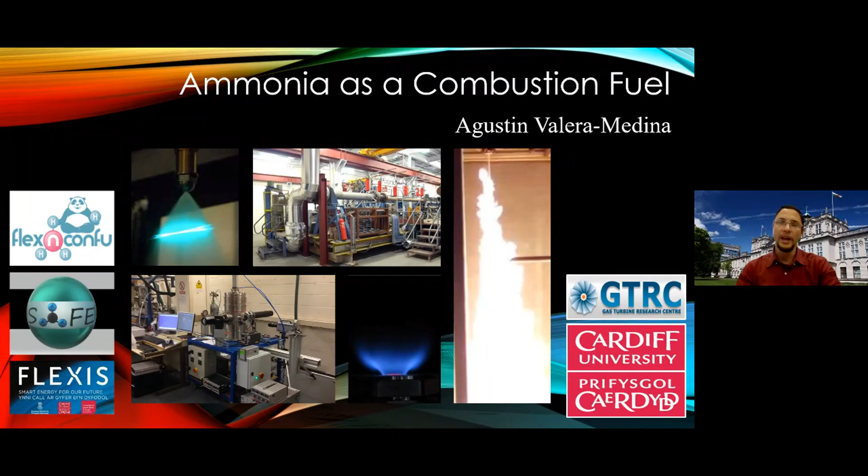Just as mentioned by Jaco, one of the things is that we're approaching the subject of ammonia as a combustion fuel, and in that sense, how it can be used to combust systems in internal combustion engines, furnaces, gas turbines, and propulsion systems. Some of the work that we've been doing relates to all these components, but also we are looking into public perception, and I will mention about it a little bit.

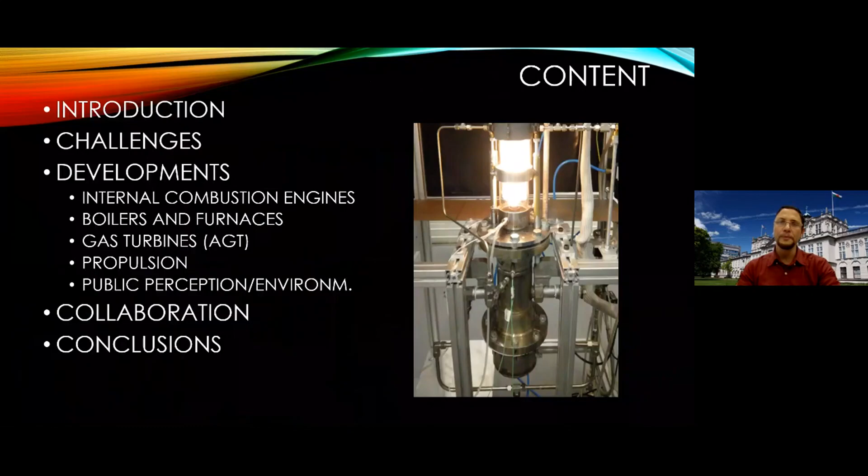Just as raised by Hans, and this is where I'll start my discussion, we're talking about renewables and then bringing all that energy to reduce greenhouse gases. Now we know already that these systems are very intermittent, and this is something that is obvious not only because we know that the sun goes and disappears, especially here in Northern Europe, but also in places like, for example, Australia.

So what happened a few years ago was Australia lost power for almost 2 weeks. They had blackouts, and this was because they were relying on alternative energies at the moment and batteries that were not coping with the demand that they had at the moment.

Just a year and a half ago, 2 years ago, here in the UK, we suffered something similar. All the region of the Midlands suffered a blackout of almost 1 million people losing power, and that was because on the day we were running at almost 50% wind power, which takes us back to thinking we need to store some of that energy if we want to have a reliable, independent power grid.

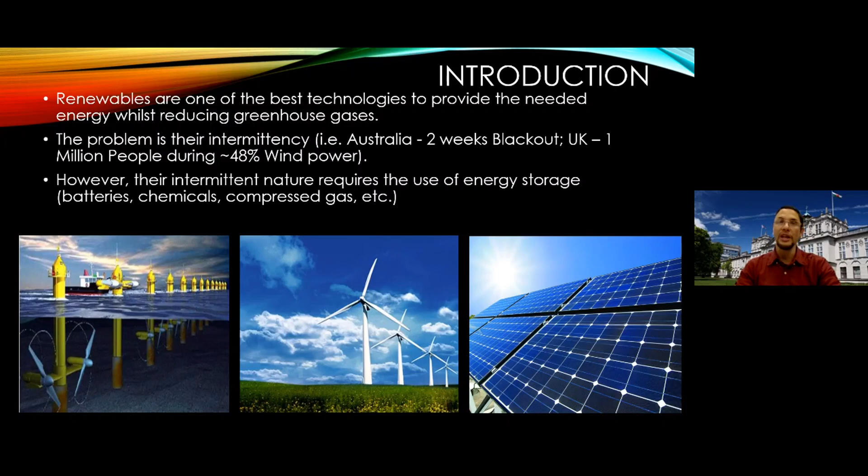And obviously, many things come to mind, and on the basis of what Hans mentioned, we've got all these different ways of storing energy, from batteries, chemicals, and compressed gas. But for our purpose, thinking about chemicals, ammonia is one of the ways forward. It's because we can capture not only these renewables, but also stranded resources, for example in the desert, offshore wind facilities far away from land, and marine energy. We can also recover some waste streams.

We can then have this energy stored for a long period of time at very cheap prices compared to hydrogen, because we don't need to compress it or liquefy it, we just need to have it slightly refrigerated or slightly pressurized. So in terms of long-term, 180 days, we're talking about differences of almost 30 times the cost between one and the other. We can also use it for islands and isolated regions.

We can employ it as a fertilizer, as it's been used for over 150 years, but also now as a fuel. It contains, really interestingly, going back to Hans' graphs, more hydrogen than hydrogen itself, because we've got another atom of hydrogen that now plays in this complexity. So we've got more hydrogen that we can transport in this way, and a very well-developed infrastructure worldwide that accounts for almost 200 billion euros per year.

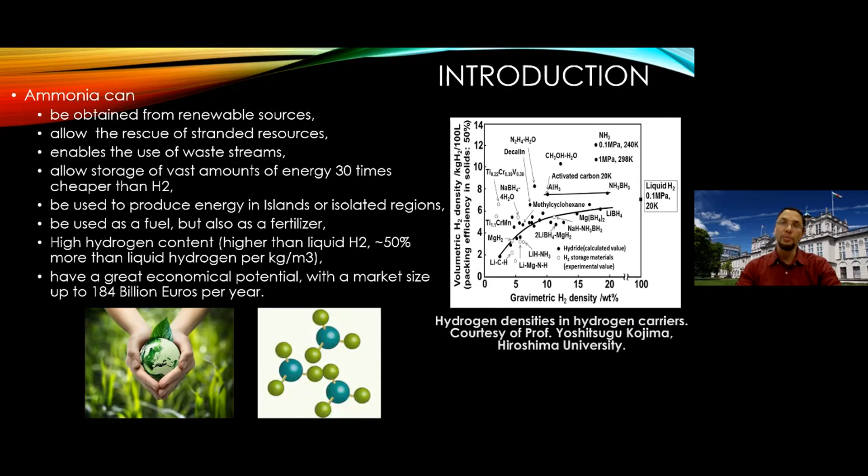You can see on the right-hand side of my screen that there are so many different ways and methods to transport hydrogen, from very complex materials to ammonia. And ammonia is the one that shows one of the best properties to do so. So again, why not use it? There are many ways forward to employ it, and as mentioned before, we've got different methods to produce it.

If we're thinking about using it as a fuel, then we can employ it in fuel cells. We can use it for transport, internal combustion engines, for heating and cooling, because it's got fantastic cooling properties. It can be burned. We can use it for process industries, propulsion, stationary power, and many other applications. One of the things that always comes to mind is, well, how are we going to do that? How is the public going to react?

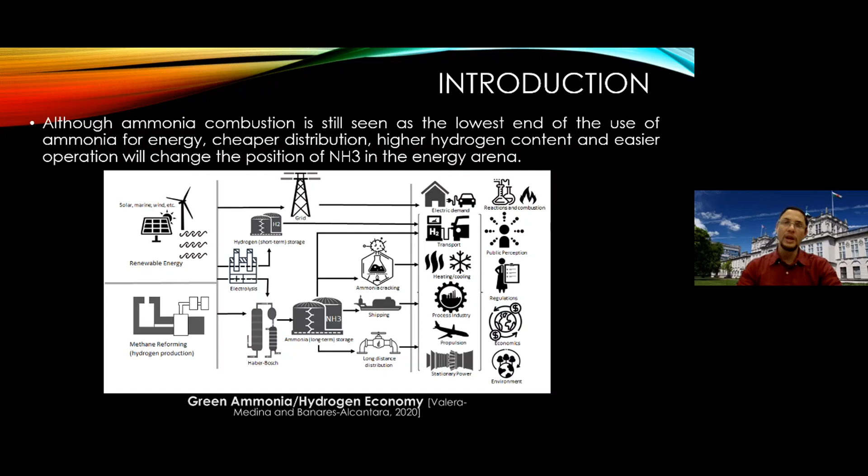Do we need the regulations to do so? What are the economics around this? Is the environment going to be better or worse? And then finally, those fundamental things about the combustion of doing so, because it's not that straightforward. So that's the reason we have engaged on this subject, in collaboration with so many other partners, that we're trying to solve.

And to the question that was just recently asked, and again, just backing up Hans' argument, in terms of zero carbon fuels, the one that shows the greatest energy density is ammonia. When compared to fossil fuels, yes, we do have diesel, petrol, ethanol, etc., that have higher energy densities. But when it comes to having zero carbon, ammonia compared to hydrogen, even liquid lithium batteries, is much better.

Something that is really interesting as well is that when we think about the cost, as I mentioned, moving liquefied or pressurized hydrogen compared to ammonia, ammonia is much cheaper than the other two. And thinking about long distances, either by ship, by rail, or by lorry, that is one of the potential applications that we can use ammonia for.

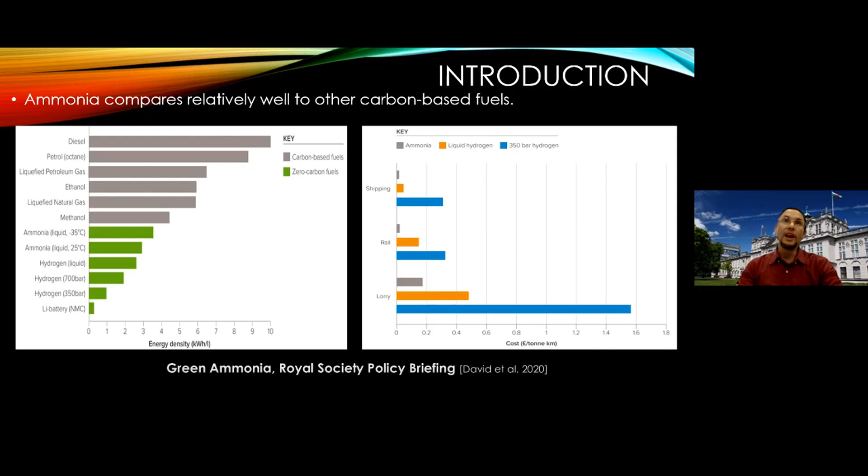One of the things that is obvious, and again, I would like to raise, is that ammonia and hydrogen in terms of power applications and combustion systems are going to be playing together. It's not that we're going to discard hydrogen completely or we're going to go for ammonia, but they're going to be complementary to each other.

One other thing that I want to mention as well is that when we compare these systems and the renewable energy and how we can use the final energy to produce power, in comparison with all these different chemicals that we have at hand, that is methane, methanol, ammonia, and also hydrogen, when we take the whole chain, the final efficiency that we can get out of these chemicals is similar in terms of ammonia compared to methane and methanol.

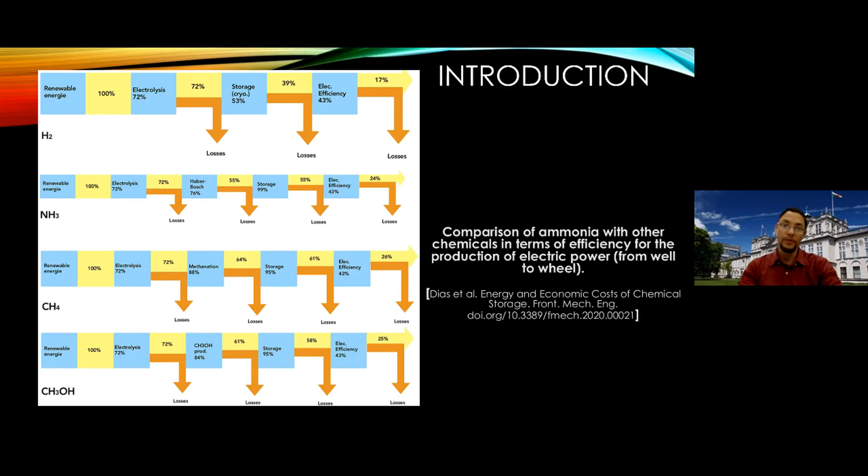But when it comes to hydrogen, because of the high amount of energy and low efficiency that we require for its storage, if we're thinking about cryogenic storage, it brings down the final efficiency that we can get to produce electric power by almost 10%. So that's, again, taking us into another argument of why not ammonia.

As I mentioned before, ammonia is going to be one of the chemicals that is going to play an important role, and this is now being said by the International Energy Agency, and we need to think about a combination of these two chemicals. It goes with so many studies that the US has been conducting over the years, and this is just one of the latest, released around 6 months ago, analyzing different cities, different situations, where they were assessing hydrogen or ammonia or a combination of both in these locations.

But if you need to store it or transport it, then you need to have the ammonia, in which case you will have seasonal stranded energy stored for a longer period and at lower costs. So therefore, a combination of both is what the future might be looking like in terms of combustion and power applications. As I mentioned, ammonia by itself might not solve all the problems, but it is definitely going to be part of the mix of fuels we'll have in the near future.

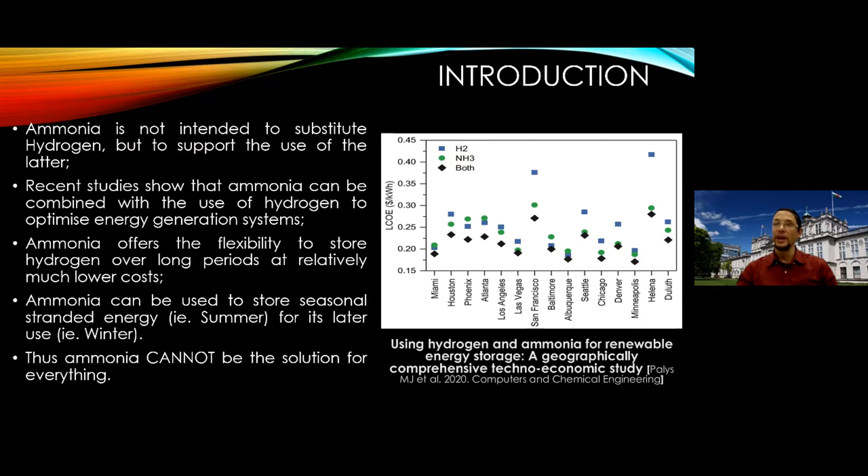And this has been recognized by many organizations. Again, the International Energy Agency in 2018 decided to include ammonia among their carriers of energy. And that was also followed by the European Union, by the UK government, by the Japanese government that has been leading all this agenda around the use of hydrogen and ammonia, Australia and many others.

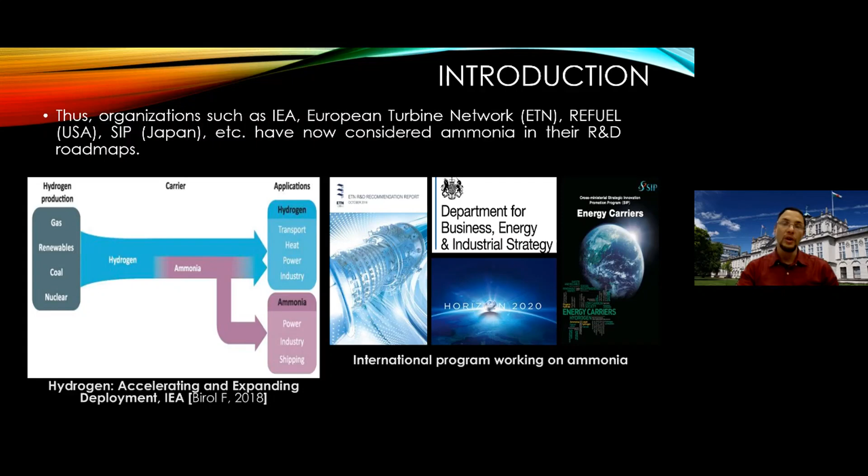The US, for example, has just released a new program where they are looking into the production of gas turbines and furnaces running on ammonia, and we're talking about $10 million that they just put into research and development. And again, many other economies are looking into how we can make this happen.

Just here's some briefing, and probably all of you know, as knowledge that you might have around ammonia, all these big programs that are now going ahead in Australia, where we're talking about all the diversification and delivery of energy from the north to the Southeast Asian region. The CF Plan agreement that was just signed a few months ago to then develop all these green technologies for the production of green ammonia.

And then finally, Neom City that is now announcing Air Products collaboration, a 5 billion renewable hydrogen to ammonia project in Saudi Arabia. And that adds to, for example, what the Japanese have been doing in furnaces, systems, and gas turbines. And recently, just 2 weeks ago, Mitsubishi releasing a communication saying that they're going to run by 2023, 2024, a 40 megawatt power unit running purely on ammonia. And this is the unit that they will be using.

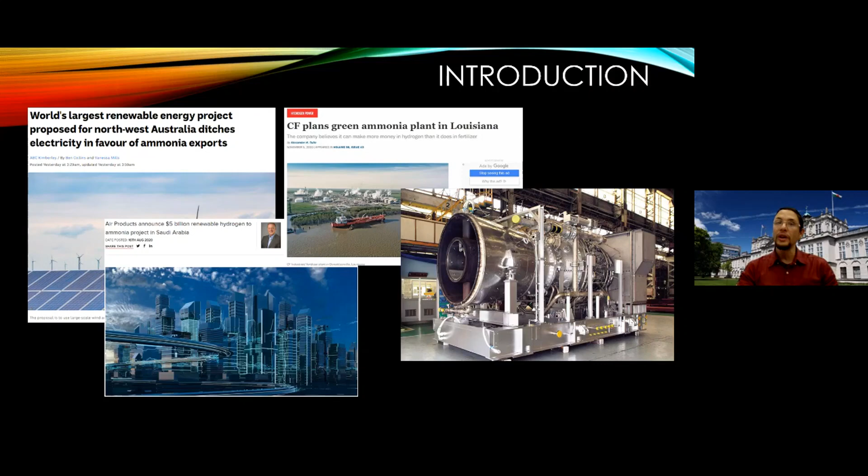So things are happening, things are going ahead, and it's not only in the fertilizing world, it's going to take over as well as part of the energy mix for power production, in synthesis and devices for industrial purposes. In our case, what I'm going to approach is, out of the 4 different challenges that we got to address when we're talking about ammonia, just the 2 in the middle. So ammonia needs to be carbon free, and we need to then reduce the cost and improve efficiency, as has been raised by Hans.

We need as well to then make it a fuel that allows for power generation at utility scale. We need to then as well acknowledge the public acceptance and the regulations that are required to do so, because otherwise we might have the best technology, but if people don't want to use it, there's no way forward for us. And then finally, the economics that need to be profitable for whoever wants to take over this subject.

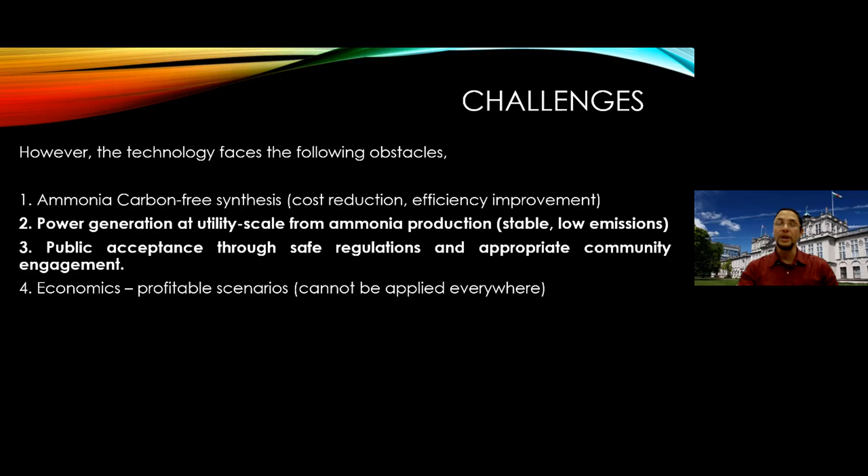So for that reason, we have engaged with lots of different partners, and I'll show you now a little bit of what we have been doing, and different subjects that go from chemistry, physics, engineering, biology, social sciences, etc., to develop the technologies that will allow us to do so, and then always think about how we can improve the environment, reduce climate change, avoid emissions, and obviously get profitable, high-efficient systems to do so.

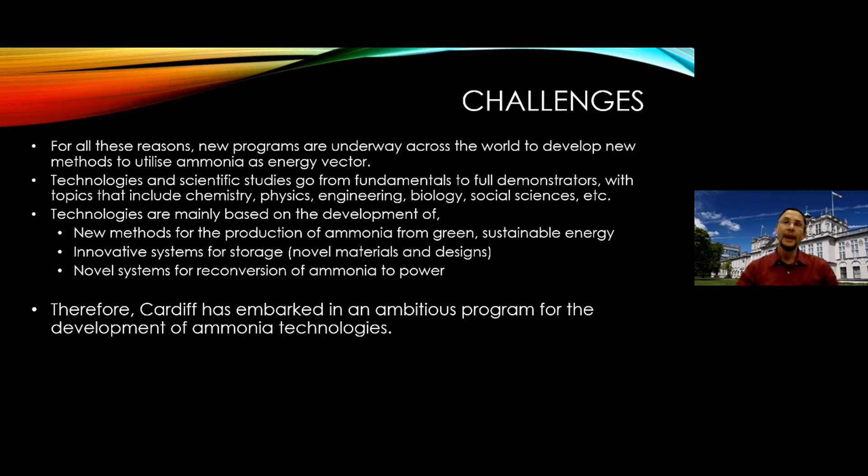So yes, just to give you a hint of what we have been doing over the past few years, we were part of the Rutherford Appleton Laboratory demonstrator at Oxford. This was one of the first, if not the first demonstrator worldwide to show the whole chain of production, storage, and consumption of ammonia, and then back to the grid energy. And we got it at Oxford, Siemens and STFC that is now holding the whole facility. They're always open to receive people interested in knowing a little bit more about the concept.

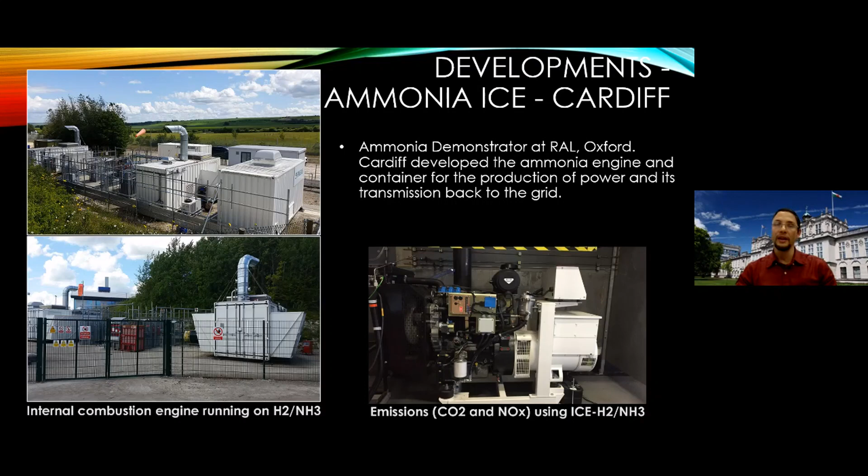In our case, what we did was develop the container that hosts the internal combustion engine that is running the ammonia to power part of the system. And this is the engine that we've been using. We converted it, and then instead of just running it on natural gas that it was designed for, what we had to do was redesign it and then allow for blends of ammonia hydrogen to run it properly.

So you can see here on the left side that we started running on some methane, and then eventually we just brought it down. So once we got it hot enough, we could then just put in all the hydrogen and ammonia to start producing energy at the same values that we had previously using just pure methane. And as you can see on the other side, we got all these emissions that are going down. Obviously CO2, as we increase the methane fraction, is going up. But when we were running on ammonia hydrogen, obviously zero CO2, CO.

Another interesting thing is that NOx was reduced under those fractions. And this comes as a surprise, and it's got to do with the unburned ammonia that we had in the internal combustion engine, another subject that I'll mention later down the line.

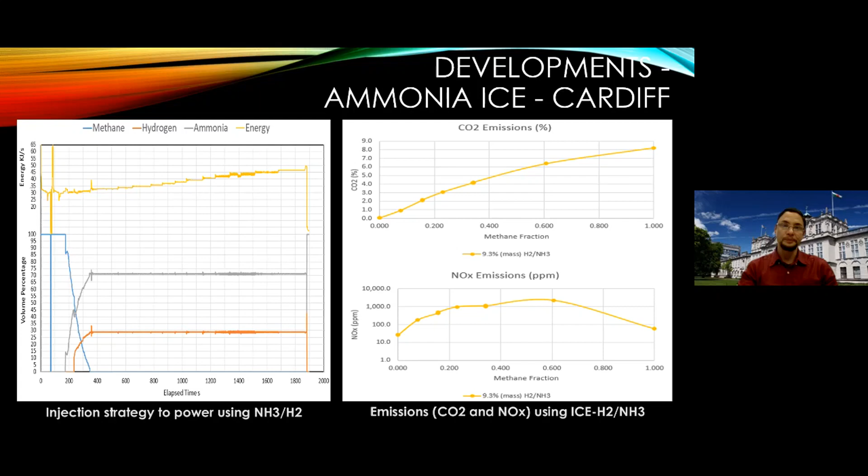Another thing that is interesting, thinking about the techno-economics of all these units, we've heard a lot about the marine industry now going ahead into development of internal combustion engines that will be run probably in the next couple of years, MAN leading some of these works, and how ammonia is going to play an important role in the following years. But something that again comes back as the techno-economic challenges that we got to surpass before we can do that is that we do have an understanding, as I showed before, of internal combustion engines.

In the case of ammonia, we don't have anything yet. And that's, again, something that needs to take us a little bit further, and we need to put some time to work on it, and effort worldwide to make this happen.

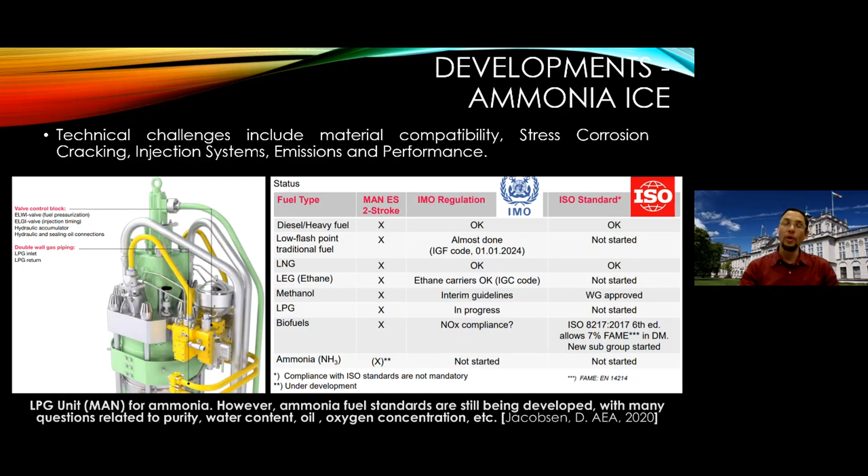For boilers and furnaces, ammonia can also be used. In the steel industry, we have the production of loads of this ammonia. For example, in the Arab world, you do have lots of this waste ammonia coming from oil and refineries that has most of the time been flared. And one of the things that can be done is actually recover some of this ammonia, and because it's got enough energy density, produce power, excess power for your units.

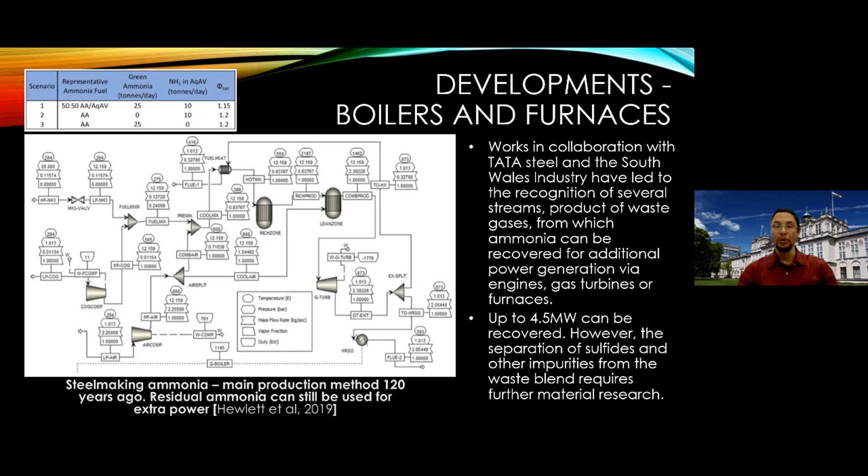And some of the works that we have been doing recently for Tata Steel show that the amount of ammonia that they got and the system that they employ for coke production can actually produce up to 4.5 megawatts of extra power if we were tapping into that ammonia. Now, one of the things is always the impurities that come with those gases, how to clean them up, things that, again, we are evaluating with Tata Steel and also with some other partners here in the region that produce cement.

In terms of gas turbines, which is the topic that we have been covering for a few years now, let me just start with this really nice assessment that was done recently by Oxford University, and they presented it in a UK-India ammonia meeting that we had just a few months ago. You can see here we have two engines, one running at 80 megawatts power on the left side. On the right side, we got one that is almost at 870, 90 megawatts.

And the interesting thing is that they were evaluating how much hydrogen would be needed if we wanted to run these units. So if we wanted to run, for example, for 1 hour, we would need tube trailers of almost half a ton of hydrogen, and 8 of those. Now, if you wanted to run it for 1 day, you would need a pipeline of 8 kilometers long to provide for that energy.

If we wanted to run the small engine of 80 megawatts power for 1 week, we would need 3 of these NASA super tanks that they use for the shuttle. And if we were thinking about running for just 1 month, that same unit on pure hydrogen, we would need 4 of these salt caverns, each of them containing around 810 tons of hydrogen.

So obviously, when we go an order of magnitude higher, that goes just berserk, completely out of hand. And just thinking about the case of 1 week of running that 870 megawatt power unit, we would need 9 salt caverns just to do so, which is, again, impossible, not feasible, and just not real.

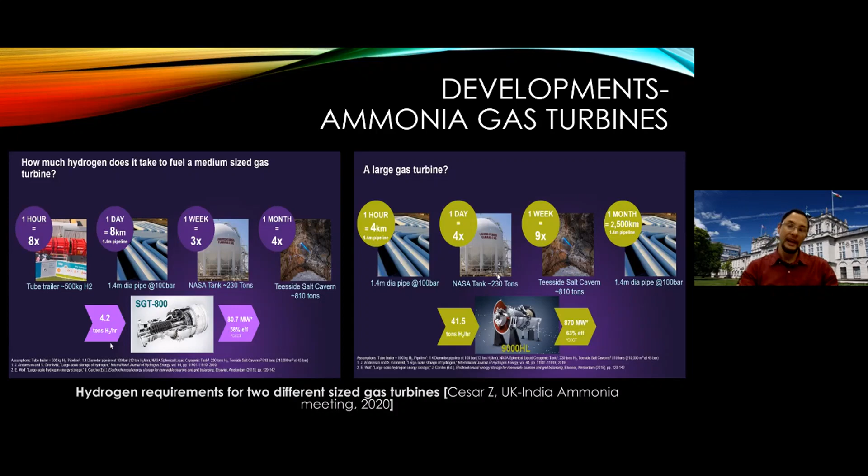But when we compare it with ammonia, something that is interesting is, because of that energy density and the amount of hydrogen that we got at hand, we would need the same amount of capacity if we compare it to hydrogen. One of these tanks that we use for ammonia that are common practice in the ammonia world, and again, you might have better details about this, can store almost the same amount of power that we would get from 11 salt caverns of hydrogen.

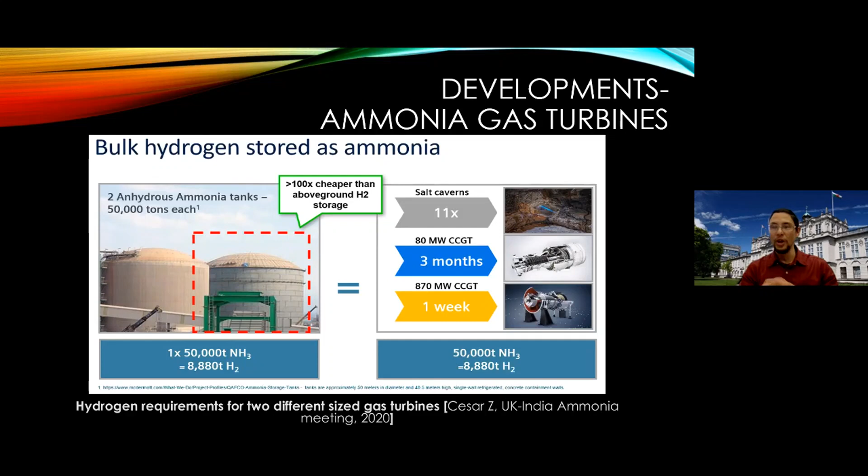So that means that if we wanted to run the 80 megawatt power unit, that single container of ammonia can run it up to 3 months. And if we want to run the 870 megawatts unit, it can go for up to 1 week. Just that single anhydrous ammonia tank, which is, again, fascinating if you compare it with the techno-economics that we got for hydrogen.

They did some other extra work on the gas turbine units, and they compared different cases: one splitting the ammonia entirely into hydrogen, another one having a combination of ammonia-hydrogen at 70-30%, and then finally using entirely ammonia.

So one of the things that they found was the efficiency, because again, as mentioned by Hans, all that energy that we put into cracking is going to be a toll that we need to take into account in the final production of energy. Comparing numbers and using different mechanisms, what they found out was that there was almost an 8% difference between the system efficiency of phase 1 to phase 3.

Now, this comes back to having phase 2. And phase 2 is because we also need to have combustion stability. Phase 3 might be feasible, but it's very difficult to stabilize an ammonia engine. This has to do with the flammability of ammonia, which is very dull compared to hydrogen, something that I'll mention right now.

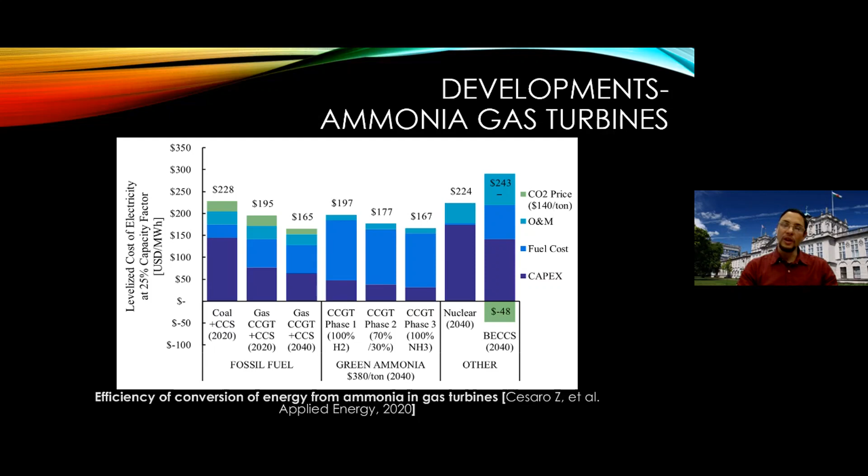They did some analysis on the levelized cost of electricity using the different platforms and the different phases, and you can see how, compared to fossil fuels, using green ammonia, as long as it stays at 380 dollars per ton, they have the same kind of cost as you would expect from fossil fuels with some CO2 pricing that might come at some point in the near future. So therefore, ammonia plays a really nice scenario for the near future, and allows us to think about how we can do so.

Going back to combustion and that blend that we had in phase 2, why do we want to think about 70-30? Well, the main reason is that the molecule of ammonia, when it burns, is very dull. We also have another thing to consider, and that is the NOx that we are going to produce. So for that, we have engaged in a lot of combustion programs and a lot of combustion research.

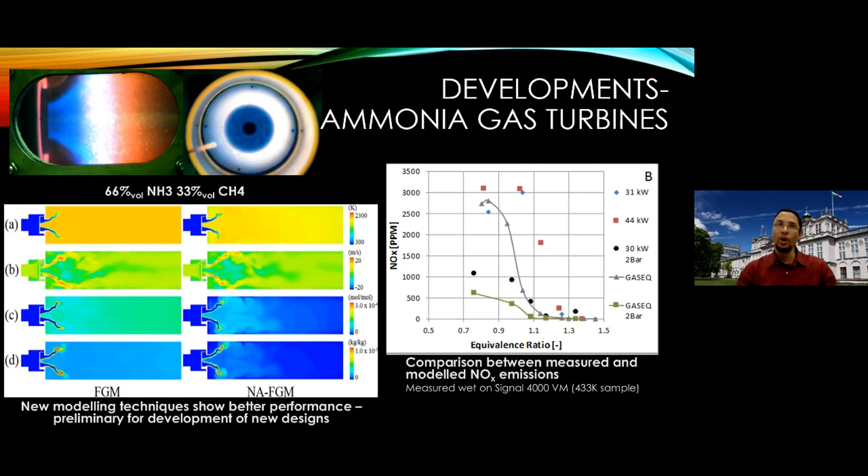Something that is always interesting is that when you run on enriched fuel conditions, an excess of fuel in your combustor, you get almost 0 or 10 parts per million NOx at those conditions. And we saw that happening when we were running with hydrogen-ammonia blends; it is always a trend. The reason is that ammonia is also a fantastic deNOxing chemical.

Ammonia has been used for a long time in diesel engines, in diesel catalytic systems, and for power applications in gas turbines and power plants, for decarbonization and deNOxing concepts. The same thing happens inside a combustor. If you have some excess of ammonia inside those combustors, you get some onboard ammonia that is going to burn and recombine with the NOx you're producing, and bring them down to levels of 10, 20 ppm in units with powers of a few megawatts.

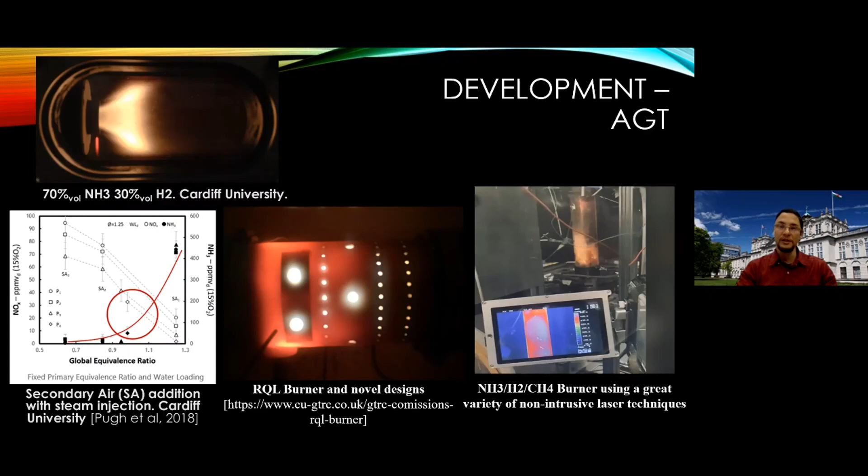And this is just talking about concepts that are still not well developed. We haven't talked about any stratification, any increase in temperature, pressurized conditions, anything like that. These are just preliminary analyses that have been done across the world, in Japan, at KAUST, in different organizations across Europe and in the US. So for that reason, what we have been developing over these years is this concept of new combustors that allow us to have high stability whilst having very low NOx emissions.

We have been going through a very long path. We are now at the stage where we're setting up and putting everything together in an auxiliary power unit to demonstrate the concept and have everything integrated into a cycle. So in a couple of years from now, we'll be able to demonstrate it for combinations of hydrogen and ammonia, with stable, high power production, very low NOx and reliable energy.

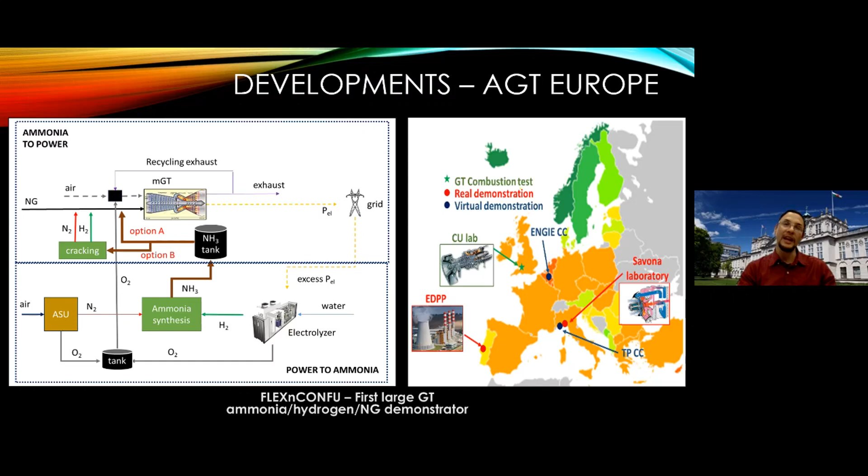We have also been working with our European partners in developing these ideas. We have a collaboration going on now with the University of Genoa, where they plan to assess a purely ammonia gas turbine of 300 kilowatts. Similarly, we're doing research with EDP, where the idea is to assess blends using ammonia, cracking some of it to produce ammonia-hydrogen blends, and finally putting it into a large power unit they have in Portugal. This goes into how we can use off-peak power to produce all this ammonia energy, and then, when we require it for peak hours, put it back into the engine to produce the excess energy we need at that time.

We got assessments showing that if we use ammonia's cooling, heating, and power applications—since ammonia has the incredible property of being a great coolant chemical—we can improve the efficiency of our Brayton cycles or combined cycles, reaching efficiencies almost at 60%. That compares to combined cycle efficiencies of current or newly developed fossil fuel based systems around 80%, but without any CO2 being involved in the process. It's very reasonable, extremely interesting, and this is without even having the stratified or more clever smart conditions we're now evaluating.

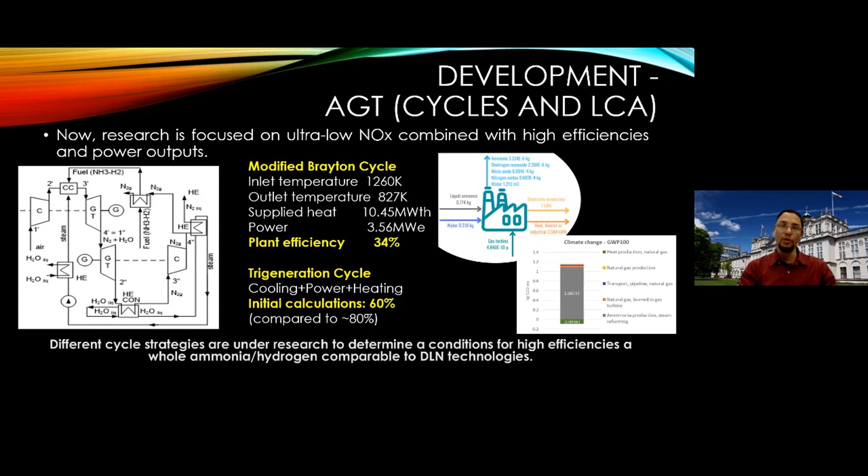Interestingly, in the case of ammonia-hydrogen, you get lots of properties that show excellent performance. The one that always comes to mind is toxicity—a major issue we need to deal with in power applications, because public perception is a massive issue we need to take into account. If someone is worried about the smell, the nuisance, and not only that, the toxicity it can cause, that's obviously a big problem.

Especially when we think about the potential exposure to ammonia, it can produce skin reactions and even particle matter. Once ammonia starts reacting with sulfates and nitrates, it produces particle matter that can go through our skin and cause a lot of problems. So we have cases of evaluating health and safety issues, public perception, and comparing hydrogen and ammonia. For example, a hydrogen leak spreads immediately, whereas an ammonia-based leak has a lower sphere of propagation, which again brings us back to considering toxicity.

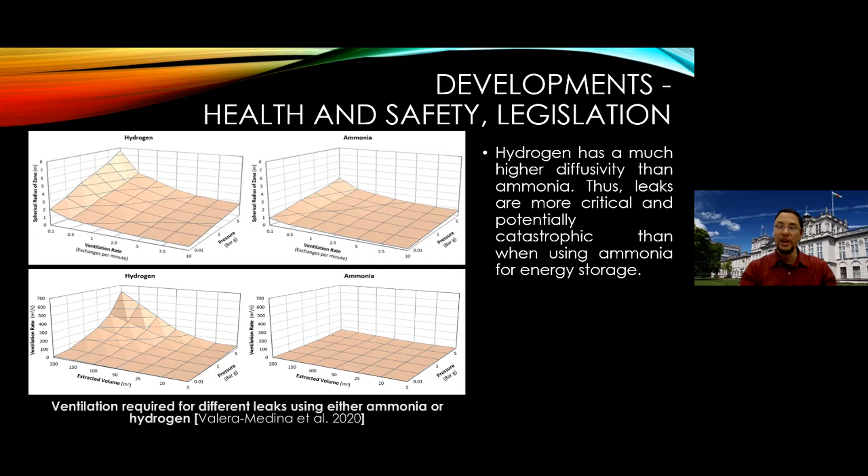Toxicity is the main challenge, and we need to solve it as part of this development. Also, public perception differs completely between developed and developing countries. In developed economies—we did this analysis using the UK and Mexico—people are concerned about the nuisance and smell of ammonia. Developing economies, because of looser regulations and restrictions, are more concerned about the poisonous, toxic characteristics—something that can kill them if there's a release—whereas in the UK, containing regulations around the smell are more important.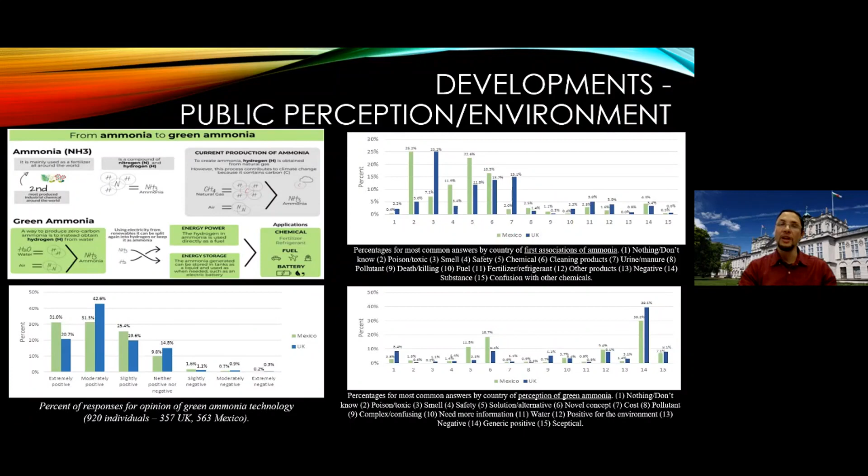We've now reached the conclusion that ammonia can be used for decarbonizing cooling, heating, power, and propulsion. It needs to be used efficiently, thinking about low NOx and the production of species that can be recombined for efficient, stable performance. Research is ongoing, and if we want this hydrogen-through-ammonia economy, we need to start doing it now, as Hans mentioned. We need a combined worldwide effort to make this happen.